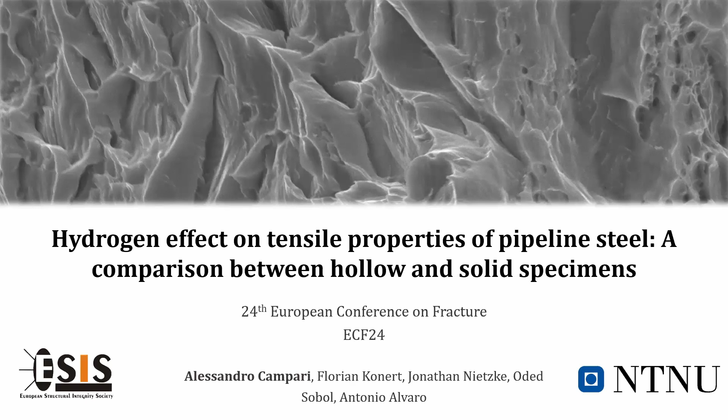Going directly to the content of the presentation, first I will briefly introduce the issue of hydrogen embrittlement and how the interaction between steels and hydrogen can compromise their durability and mechanical performance over time. After that, I will talk about the testing technique we use to assess the influence of hydrogen on mechanical properties of steels, focusing mostly on autoclave testing and the hollow specimen testing technique, which has also been introduced in the previous contribution. Then I will talk about the materials we investigated, an X65 pipeline steel, and the methodology we used.

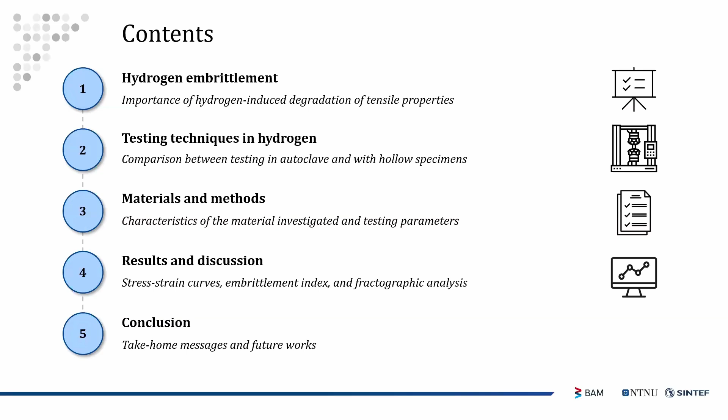After that, a more detailed discussion about the results we obtained, focusing on the stress-strain curves, the embrittlement index, and a brief fractographic analysis. Finally, some take-home messages, a summary of the results, and some ideas for future work.

As mentioned before, hydrogen embrittlement is an environmental degradation that consists of a loss of mechanical properties, particularly tensile properties, resulting from the ingress of hydrogen atoms within the metal lattice. This physical phenomenon relies on the synergistic interaction of many factors. Although it has been widely studied in the past, it has not been fully understood so far. It relies on the effect of the environment, which should contain hydrogen, and more particularly on the temperature of the operating environment, but also the pressure and hydrogen purity.

We also need a susceptible material. The material could be susceptible or not based on its chemical composition, microstructure, and strength, but also the presence of internal defects. Finally, the presence of mechanical load. In this case, since we tested with slow strain rate tensile tests, we consider the strain rate, but also the presence of stress concentration.

That could result from notches or pre-existing defects. All these parameters are crucial for the material's susceptibility to hydrogen embrittlement, and they should all be thoroughly evaluated when it comes to evaluating the suitability of an existing infrastructure for hydrogen transport and storage.

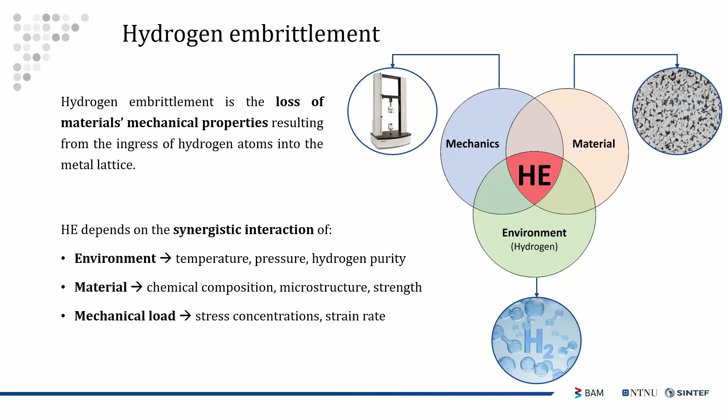From a more engineering perspective, there are only a few standards available for the design, inspection, and maintenance of industrial equipment that are exposed to hydrogen or normally operate under hydrogen environments. The lack of a unified regulatory framework results in over-conservative design criteria and a limited choice of steels that could be used for hydrogen service.

Moreover, it is particularly interesting from an engineering point of view to retrofit the existing pipeline network in order to use it for transporting various amounts of hydrogen, either pure or blended with natural gas. But in order to do so, we have to thoroughly evaluate the impact that hydrogen atoms have on the structural integrity of the pipelines.

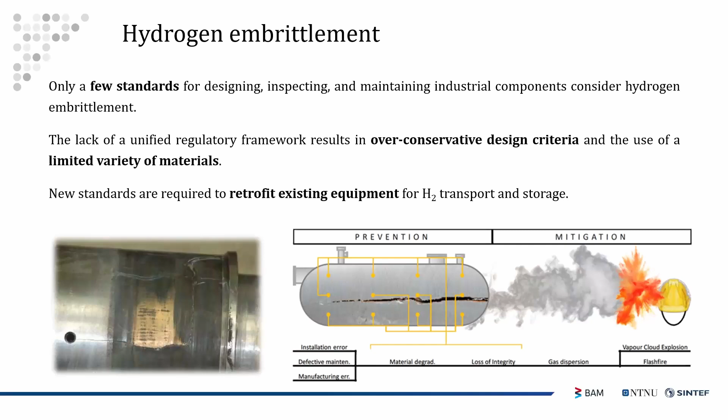In order to test the effect of hydrogen environments on materials, we have several techniques. They could be either ex situ or in situ testing. When it comes to ferritic steels, we basically rely on in situ testing, charging with gaseous hydrogen to mimic the actual environmental conditions of a pipeline. We can use either an autoclave filled with high pressure hydrogen, or a more novel and unconventional technique that uses a hollow specimen as a containment volume for pressurized hydrogen.

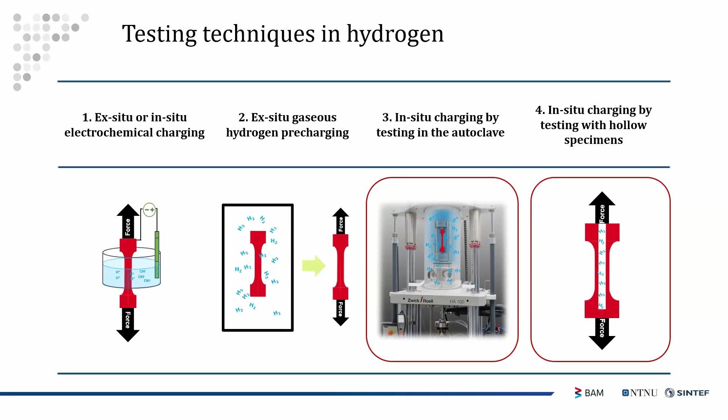I will not go in depth, since it has already been explained, but I will briefly summarize some advantages of the first technique and the second one. Autoclave testing is a well-established technique; it is standardized, and we have clear indications regarding the testing conditions and the geometry of the specimen. On the other side, this technique is very expensive and involves very high safety regulations, because we are handling highly flammable fluid under high pressure.

A hydrogen autoclave is extremely dangerous and should be properly handled by highly specialized personnel. This technique is very complex and difficult to maintain, and it also has a long overall test duration. All these limitations reduce the testing capability of a laboratory.

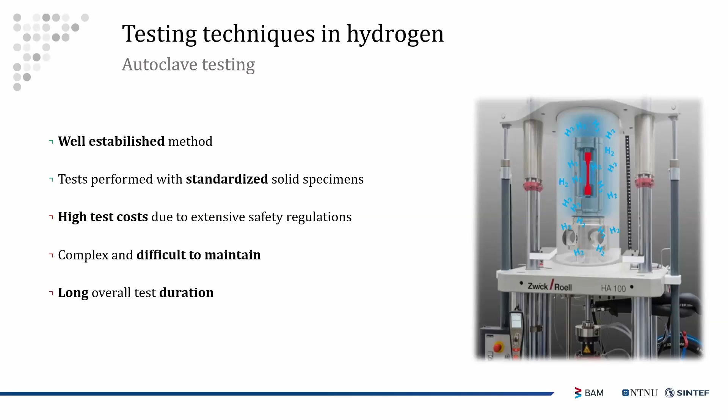In order to overcome these limitations, we also use the hollow specimen testing technique. On one side, it has not been standardized because it is relatively novel. Therefore, it is very difficult to compare the results of previous tests obtained with conventional methods to the new results obtained with hollow specimens.

But in this case, as it was mentioned before, the sample itself acts as an autoclave and mimics the conditions of a pipeline or a tank. Only static sealings are necessary to isolate the specimen, so this technique is way simpler to handle and reproduce compared to autoclave testing.

It has a shorter overall test duration and very limited costs. I cannot go in depth on this point, but there is an order of magnitude of difference in costs for each test, so it is extremely noticeable.

We have tested a different steel. It is also pipeline steel, but in this case a vintage X65 pipeline steel manufactured by Fukuyama Steel Industries in 1982 and used for around 40 years for natural gas transport subsea. It is a Norwegian subsea pipeline, extracted from the base metal of this pipeline, from the mid-thickness in the longitudinal direction.

The chemical composition was measured by optical emission spectroscopy and is coherent with the specification of the standard API 5L.

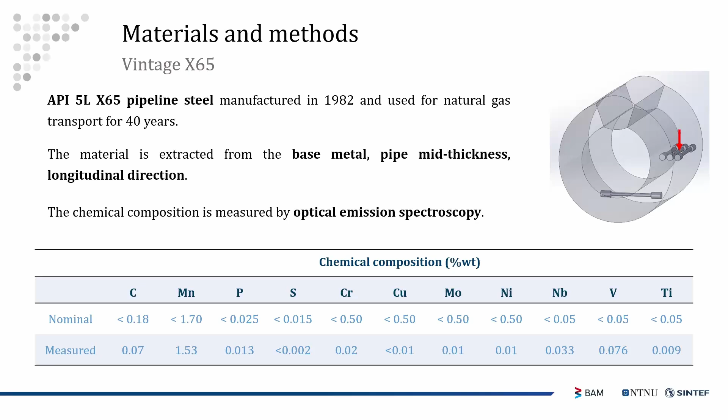The microstructure was also investigated, and it is composed of polygonal ferrite and pearlite in banded appearance, but there are also plate-like bainite bands in the direction of the rolling.

We have also measured through strain rate tests the yield and ultimate tensile strength. Basically, we figured out that this banded microstructure could result in a highly anisotropic mechanical behavior of the specimen tested both in air or argon and in hydrogen. But we will talk about it later.

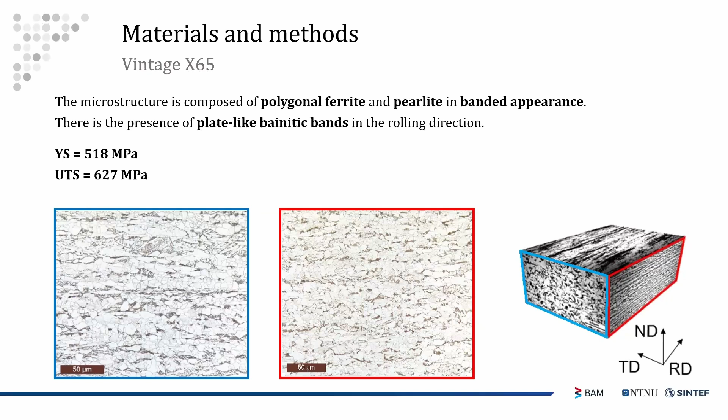So the specimens were manufactured in different ways because we have both hollow specimen and solid specimens. In the case of hollow specimens, we have used two different manufacturing techniques in order to evaluate the impact of inner surface roughness on the susceptibility of the steel to hydrogen embrittlement.

The first type of specimen was manufactured by conventional drilling, and the second by drilling and reaming in order to obtain a smoother surface roughness.

On the other side, the solid specimens were manufactured by conventional turning in order to obtain the same gauge diameter of the hollow specimen and have somehow comparable results. Unfortunately, we weren't able to obtain exactly the same roughness of the reamed specimen on the external surface of the solid ones, but we tried our best to achieve a similar surface roughness in order to have comparable results.

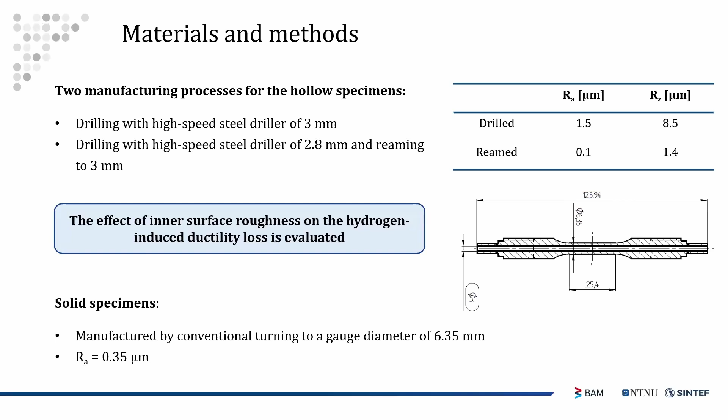So, considering the testing techniques both in the autoclave and with hollow specimen, we use the same hydrogen purity, which is a grade 5 hydrogen. And we try to obtain a very low oxygen content because oxygen is well known to be an inhibitor for hydrogen embrittlement.

So we purged 6 times from 10 bars to 60 bars in order to achieve the desired oxygen content within the autoclave and within the hole of the hollow specimen.

And also the tests were conducted at room temperature with the same nominal strain rate of 10 to minus 6, so very slow strain rate.

And in the case of the autoclave, the sensors were able to monitor online the presence of hydrogen, so we can guarantee that the nominal testing conditions were kept constant during the entire duration of the test, which is approximately 3 to 4 days for tests conducted in hydrogen.

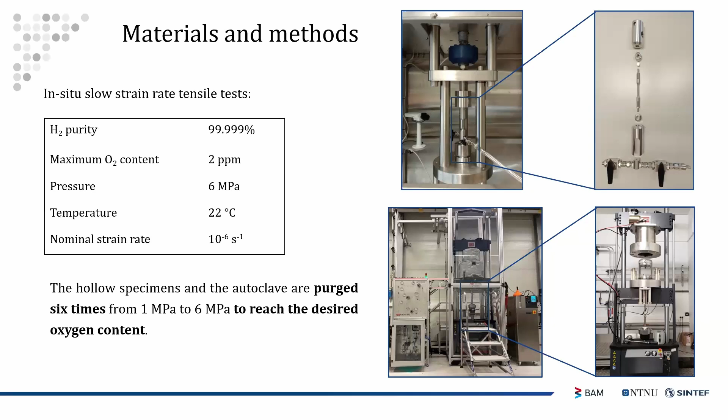Regarding the results we have obtained after this testing campaign, we evaluated the impact of hydrogen on the tensile properties using a well-known index known as the embrittlement index.

It is defined as the ratio between the reduced area factor measured in reference environment - in this case, we used argon for hollow specimens and air for tests in autoclave - minus the reduced area factor in hydrogen, divided by the reduced area factor in the reference environment.

So the higher the embrittlement index, the higher will be the impact of hydrogen on the tensile properties of the steel. In the graph on the right-hand side, you can see that the tests were conducted with all the specimens.

Either drilled and reamed at 60 bars, and also at 60 bars with the solid specimen, but we have conducted other tests with solid specimen at higher pressures, up to 500 bars, in order to exploit as much as possible the capability of the autoclave.

And we can see that even if the embrittlement index obtained with the drilled and reamed specimen and conventional specimen is basically uncomparable, because the geometry of the specimen is way different, we can see that the higher the pressure of hydrogen in the autoclave, the higher will be the embrittlement index.

So we don't see any saturation effect up to 500 bars. And this is quite interesting, because increasing the pressure of hydrogen within the pipe, we will also increase the susceptibility of the steel, so we have a continuous degradation as we increase the pressure.

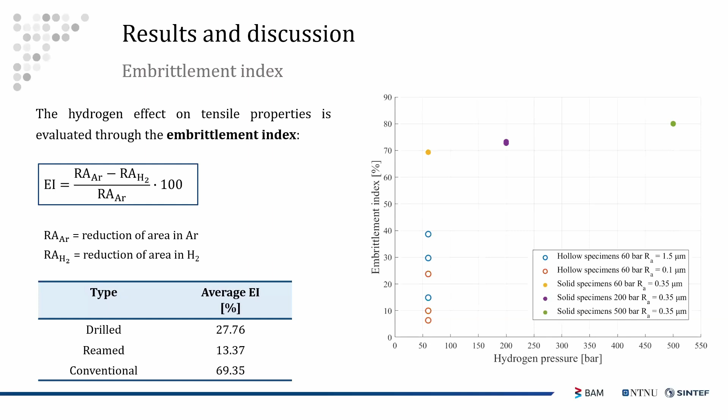Considering the stress strain curves obtained in a hydrogen environment, we can see that the drilled specimen manifests a significant elongation loss, while the elongation loss for reamed specimen is lower. There is also lower scattering for the reamed specimens, depicted with blue lines, compared to the drilled specimen in red lines. The black line is for the conventional test conducted with a solid specimen, which is basically the average of the other tests.

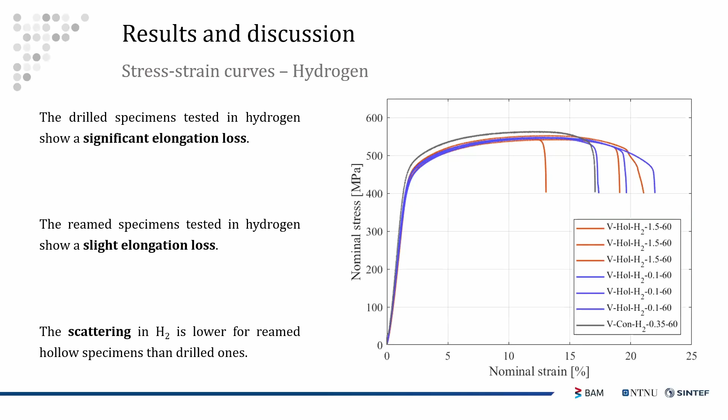On the other side, the stress strain curves obtained in argon, the reference environment, show a very limited scattering for both the drilled and reamed specimen. So there is no substantial impact of the surface finishing when evaluating tensile properties in an inert environment. There is a difference for the solid specimen, but that's mostly due to the completely different geometry we have in this case.

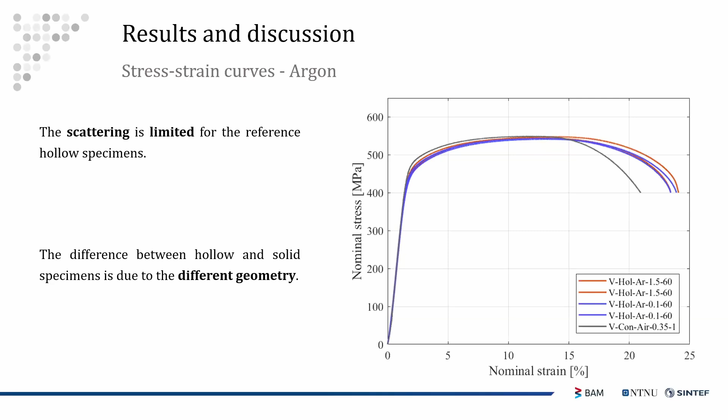Going to the fractographic analysis in hydrogen, moving from left to right we see the test conducted with a solid specimen, with a hollow drilled specimen (higher roughness), and on the right, the hollow specimen in reamed configuration. For all of them, we have very limited necking and three different zones: the first, closer to hydrogen, is a brittle zone characterized by quasi-cleavage fracture, then a transition zone, and finally, far from the hydrogen exposure, a ductile zone characterized by microvoid coalescence.

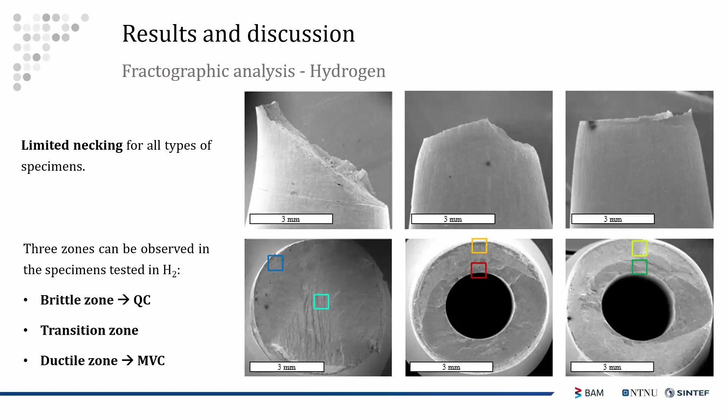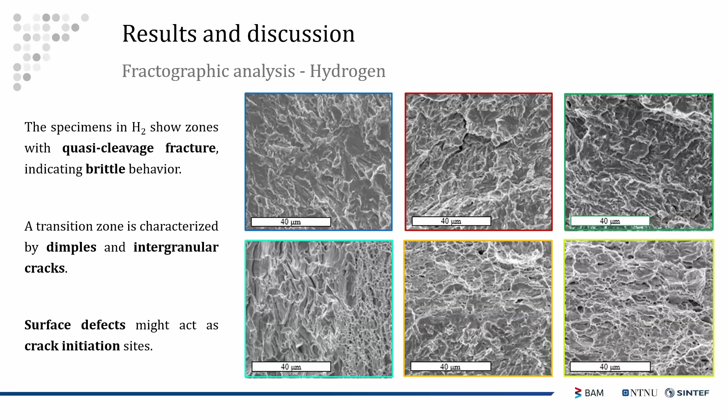We figured out, considering the portion of quasi-cleavage fracture and microvoid coalescence, that surface defect has a strong impact because defects can act as crack initiation sites. So the fraction of quasi-cleavage fracture is way higher in the case of the drilled specimen.

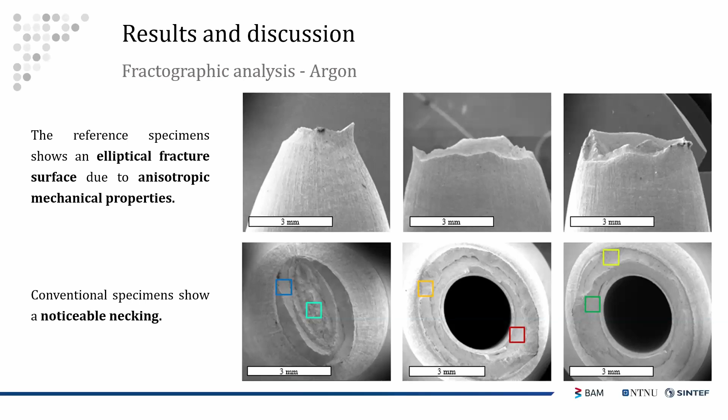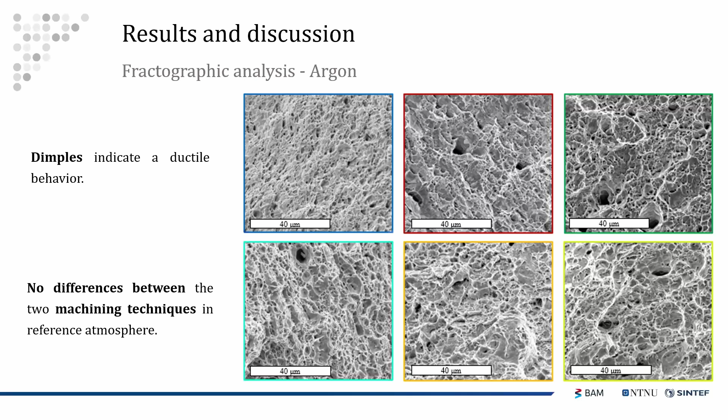To summarize the main results of this research, the scope of the overall study was to compare the tensile properties in high-pressure hydrogen environments obtained with a traditional in situ testing technique using the autoclave, and the more novel hollow specimen testing technique. For all these tests, we figured out that the tensile properties of vintage X65 pipeline steel with banded ferritic and pearlitic microstructure are significantly degraded by pressurized hydrogen gas. So the existing Norwegian pipeline network could be repurposed for hydrogen transport, but with lower pressures, so lowering the operating pressure of the pipelines.

For all these specimens, we figured out that there is the presence of a quasi-cleavage brittle region, a microvoid coalescent ductile region, and also a transition zone in between.

In the future, we will evaluate the different stress fields in hollow and solid specimens in order to better understand the physics behind these tests and to better understand how this stress field impacts the susceptibility of the material and of the steels under different testing conditions.